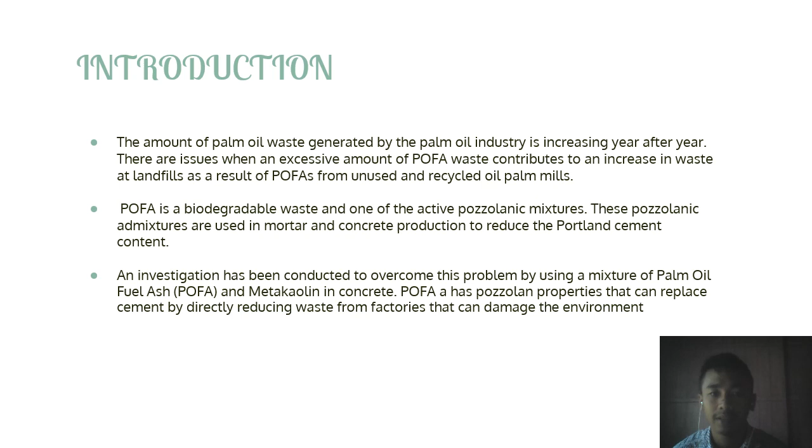An investigation has been conducted to overcome this problem by using a mixture of POFA and metakaolin in concrete. POFA has pozzolanic properties that can replace cement, directly reducing waste from the factories that can damage the environment. So this is the aim of the research: to study the effect of POFA and metakaolin on high-strength blended concrete exposed to sodium chloride.

So there are three objectives here. Objective number 1 is to analyze the mechanical and transport test results of the OPC and ternary blended concrete. The second objective is to analyze the mineralogical phase of OPC and ternary blended concrete through XRD analysis, and the third objective is to compare the mechanical and transport analysis results with the XRD analysis results.

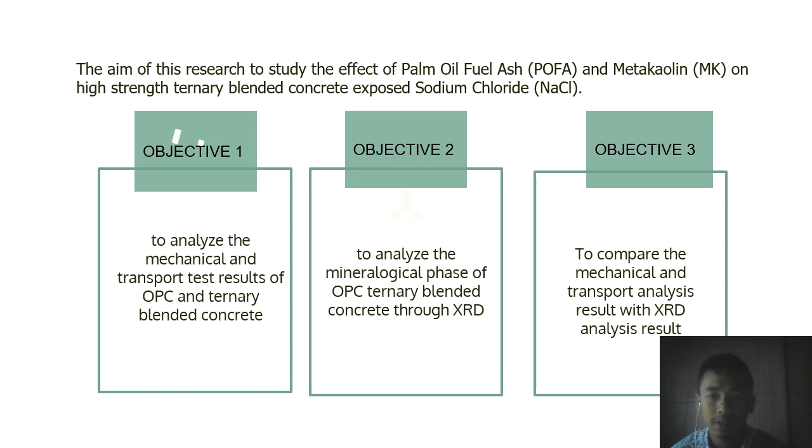So this is the literature review and properties of POFA. According to Muthusamy in 2018, increasing the percent of POFA in concrete from 10% to 30% resulted in higher strength than the control. And in terms of chemical properties, POFA contains 51.1% more silica than OPC. Silica is required for the pozzolanic process to produce the C-S-H gel.

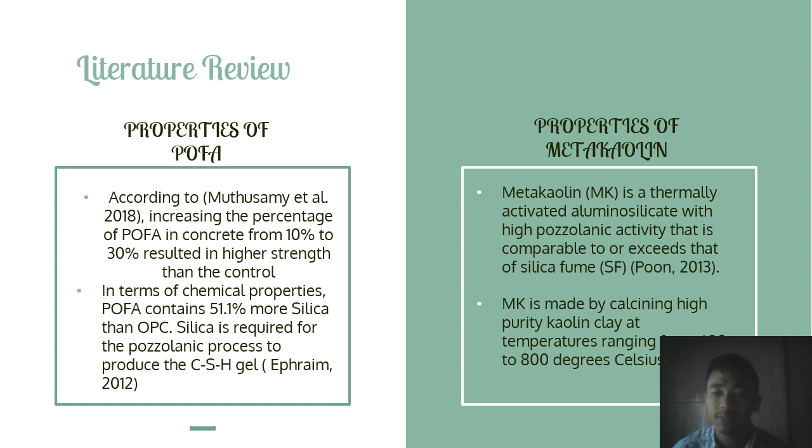And properties of metakaolin. Metakaolin is a thermally activated aluminosilicate with high pozzolanic activity that is compared to that of silica fume. And metakaolin is made by calcining high purity kaolin clay at a temperature range from 600 to 800 degrees Celsius.

So, the effect of sodium chloride on concrete. The chloride content in concrete influences the electrical resistivity of the concrete, and thus the kinetics of reinforcement corrosion as long as the corrosion process is under resistive control. According to Moinul in 2009, the average salt concentration in seawater is around 3 to 4%. This study will show the effect of sodium chloride on the concrete.

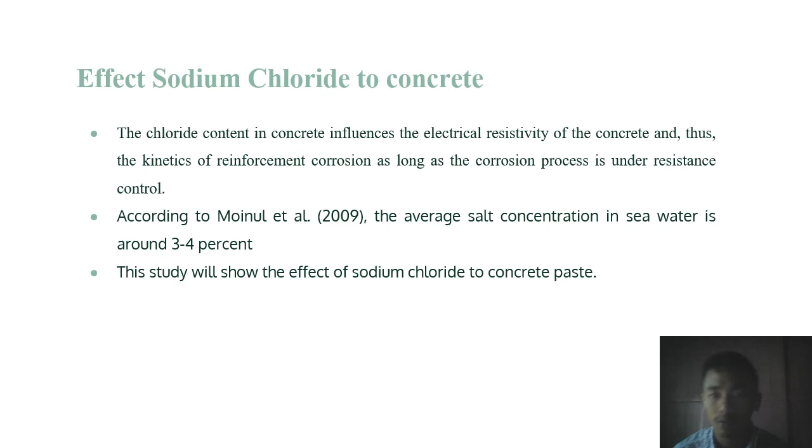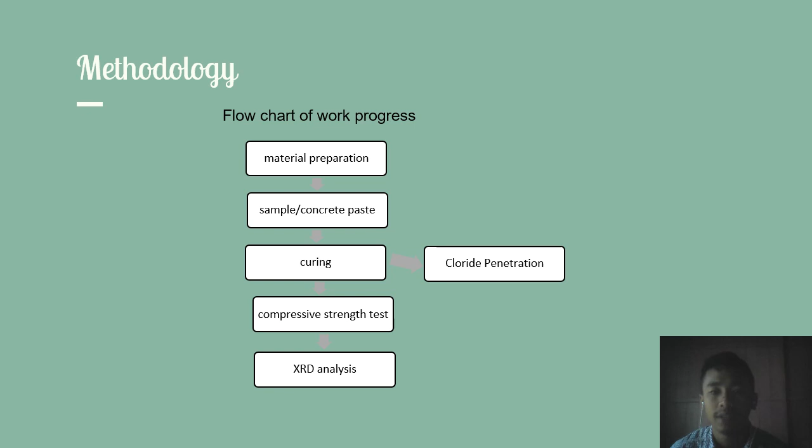So this is the methodology, the flowchart of work progress. The first step is material preparation. Second is sample concrete casting. Third is curing, and next is compressive strength test, XRD analysis, and chloride penetration test on the concrete.

So, exposure of concrete to sodium chloride. All samples of concrete were demolded at age 1 day before being cured under normal conditions up to 28 days. After 28 days of normal curing, the concrete samples were exposed to sodium chloride until 180 days. The compressive strength test was performed on concrete samples under normal water exposure.

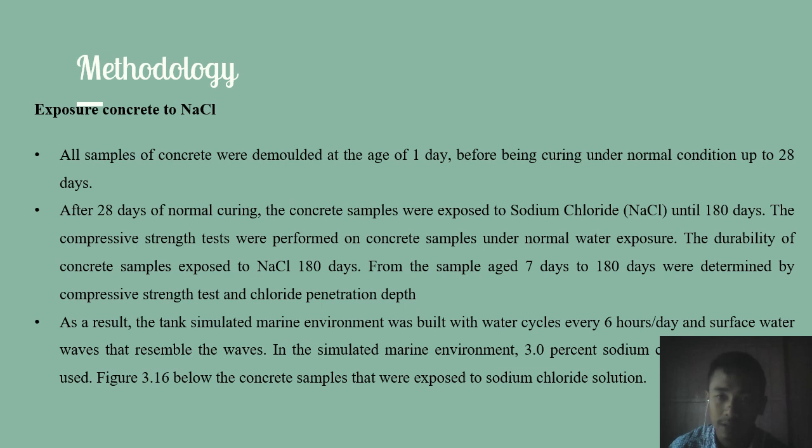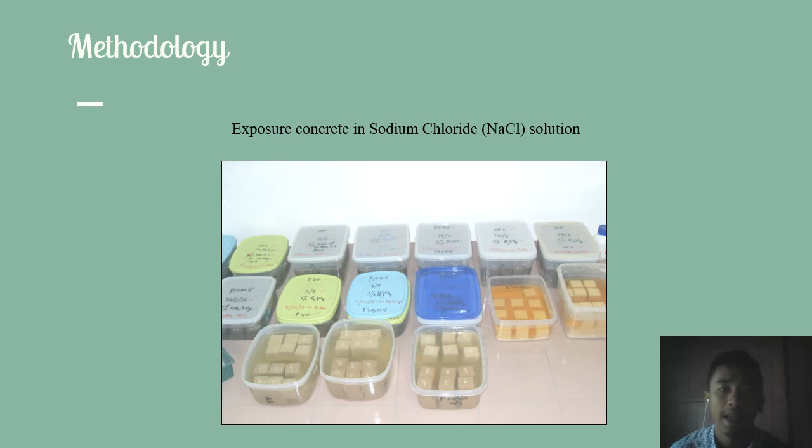Durability of concrete samples exposed to sodium chloride from 7 until 180 days was determined by compressive strength test and chloride penetration depth. As you can see, this is concrete under the curing process, and this is concrete exposed in sodium chloride solution.

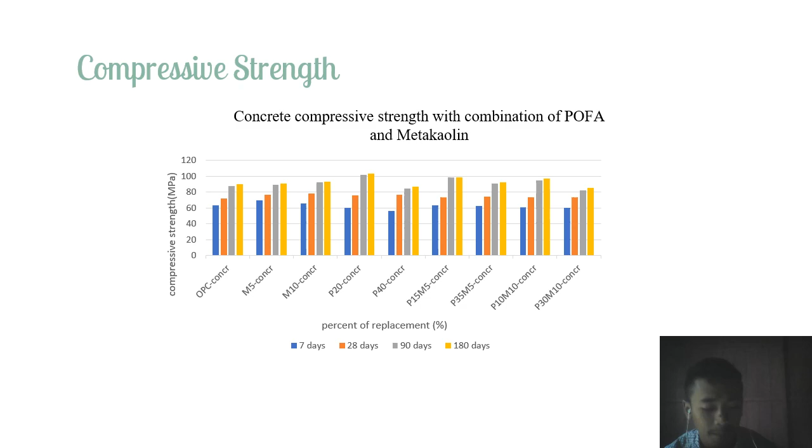The depth of chloride penetration is clearly higher for the control sample than for POFA, metakaolin, and mixed specimens. This is because the OPC concrete, which contains 100% OPC, induces a higher hydration reaction than OPC concrete containing POFA, said Sata, 2007. Overall, the graph of the chloride penetration test shows a slight decrease. This is because of the reduction of OPC in the concrete mix.

The performance shows the chloride penetration depth is lesser for POFA 30, metakaolin 10, that is formed using POFA with high fineness. Incorporating POFA with great fineness accelerates the pozzolanic reaction, leading to the development of additional CSH gel, which makes the concrete denser and more resistant to chloride.

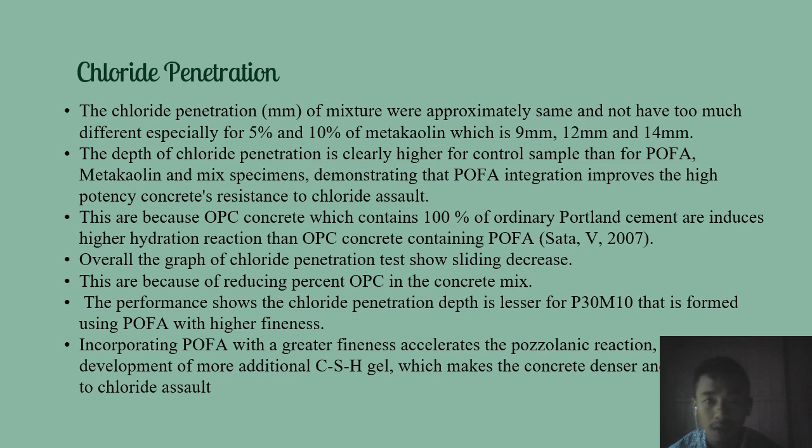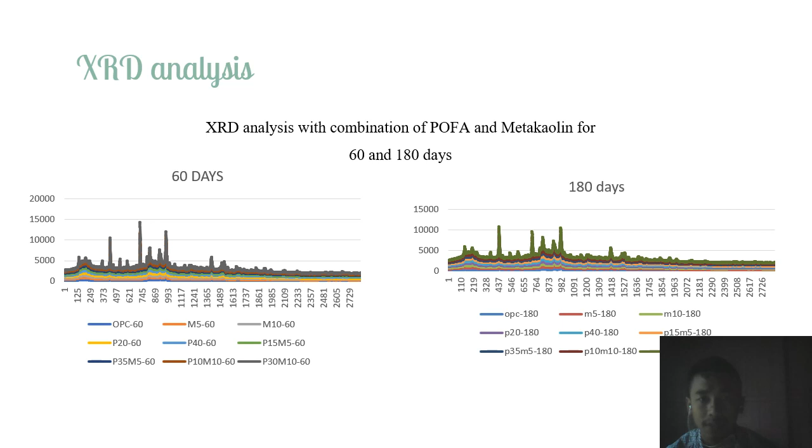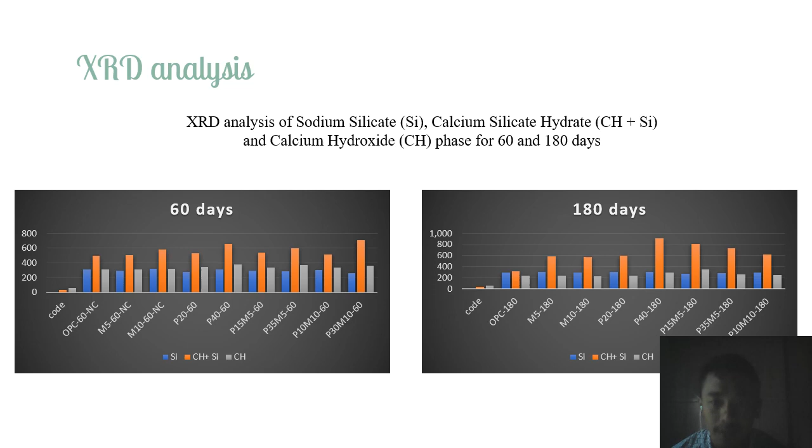Okay, the figure shows the XRD analysis of the combination of POFA and metakaolin for 60 and 180 days. And this figure shows the XRD analysis of sodium silicate, calcium silicate hydrate, and calcium hydroxide phases for 60 and 180 days. So from the figure, we can conclude the results of XRD analysis presented in the figure above were obtained from samples after exposure to sodium silicate solution for 60 days and 180 days.

It can be observed that all specimens comprise primarily sodium silicate, calcium silicate hydrate, and calcium hydroxide. From the bar graph above, the CH plus Si was highest among the other mineral phases. The most intense peak appeared when POFA was fused with metakaolin in a ratio of POFA 30% and metakaolin 10% after 60 days, and for POFA 40% at 180 days. Its peaks appear as POFA was fused with the alkaline agent to produce calcium silicate.

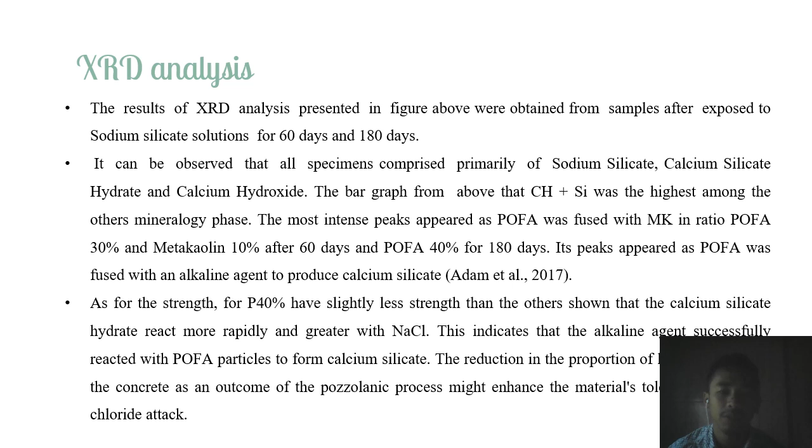As for the strength, 40% POFA has slightly less strength than the others, showing that the calcium silicate hydrate reacts more rapidly and greater with sodium chloride. This indicates that the alkaline agent successfully reacted with POFA particles to form calcium silicate. The reduction in the proportion of lime accessible in concrete as an outcome of the pozzolanic process might enhance the material's tolerance to sodium chloride attack.

It can be clearly seen that the peaks of the CH plus Si phase containing 40% POFA are lower than the peaks in the control at 60 days and 180 days. When XRD peaks of OPC concrete with 10% metakaolin are compared, it's completely obvious that the incorporation of metakaolin particles with silicate minerals acts as a nucleation agent, consuming CH and enhancing the formation of CSH gel, increasing the compressive strength of the concrete mixture.

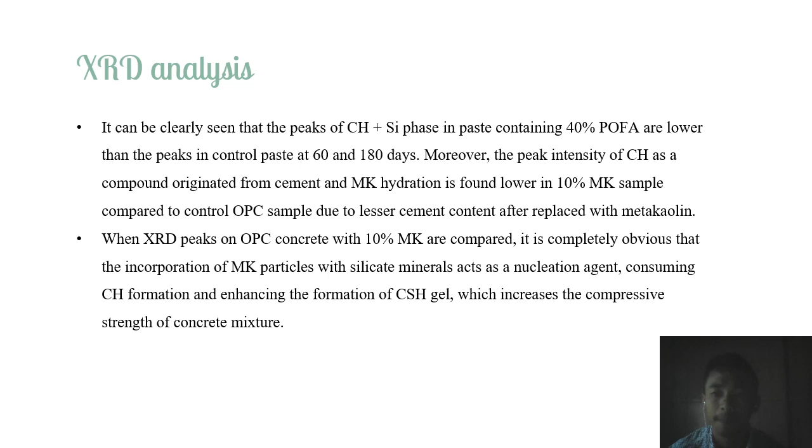So, in conclusion, the aim of this study was achieved by understanding the properties of POFA and metakaolin as cement replacement material. Next, the optimal percentage of the mixture as cement replacement material was successfully found. It can be concluded that 20% POFA at 180 days is the optimum percentage to be used. The properties of POFA and metakaolin as cement replacement material show that the design is safe for use as construction material.

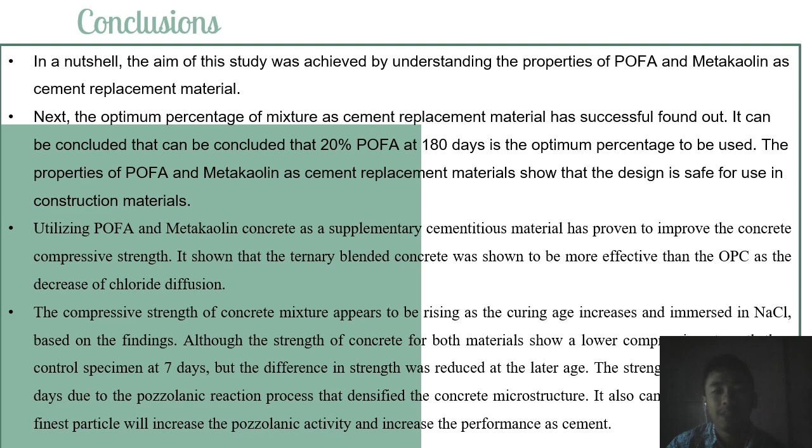Utilizing POFA and metakaolin as supplementary cementitious materials has proved to improve concrete compressive strength. The compressive strength of the concrete mixture appears to rise with curing age and increasing immersion in sodium chloride. Based on the findings, concrete with both materials shows lower compressive strength than the control specimen at 7 days, but the difference in strength was reduced at later ages. The strength increased after 28 days due to the pozzolanic reaction process that densified the concrete microstructure. It can also be concluded that fine particles will increase the pozzolanic activity and increase the performance as cement.